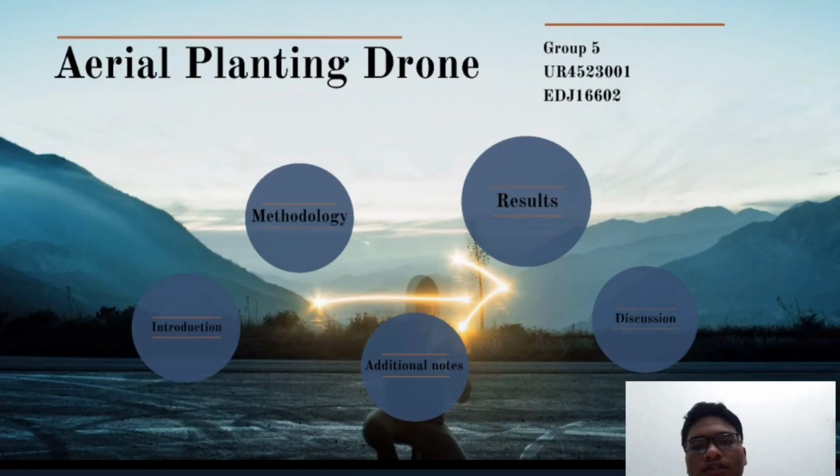Drone development already began in the early 20th century, during World War One. The main function of drones at that time was only for military uses such as bombing, surveillance, and reconnaissance. Drones didn't possess sophisticated ability at first, but recently drones have continued to advance, with many other uses such as photography, delivery services, military operation, search and rescue missions, and other activities.

I will also talk about the background of how our team got the idea to use drones as a method to plant trees. Recently, many news reports have stated that very serious climate change has alarmed numerous parties such as nations and governments.

To combat this problem, many nations and non-governmental organizations have started taking action to plant trees, particularly forest trees. But the problem is planting trees requires an excessive amount of human labor and wasn't effective. The main reason it's not effective is because of the terrain topography, and also the area which is very wide, taking a long time just to plant the trees.

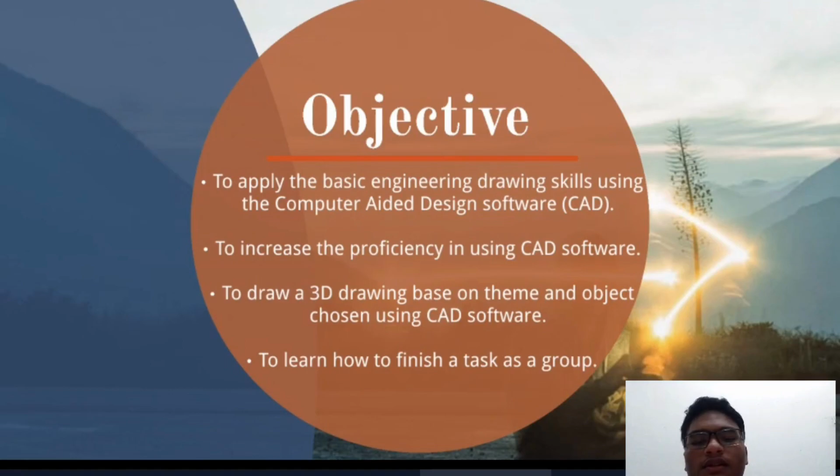For methodology, we basically finished the project within 1 month. We started on 29 March, discussing the details about the project, and then on 5 April our group leader Karani presented our theme to the lecturer, and then we discussed with the group members more about the project.

On 6 April we discussed further, and then we submitted the mini project report on 12th April, and uploaded the report on GC on 17 April. The last step was uploading the group presentation with video on 26 April.

For additional notes, we basically used fillet edge to create fillets in the 3D drawing, which saved us a lot of time upon completing the drawing.

For the result, we did 5 drawings: the main body, propeller, seed dispenser, stand, and assembly drawing.

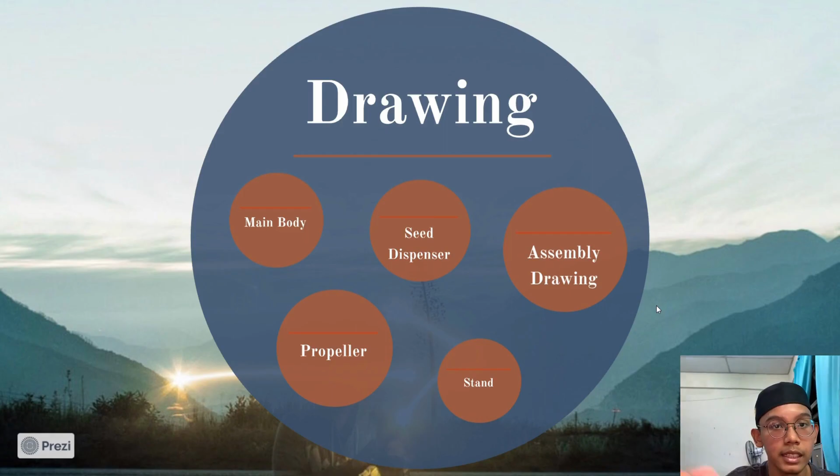For the main body, it offers a solid foundation for the rest of the parts, to guard against damage brought on by impacts or the environment. The last point is the drone's aerodynamics, which impact its speed, stability, and maneuverability.

I think the main body is the most important thing, affecting the impact resistance, speed, stability, and maneuverability.

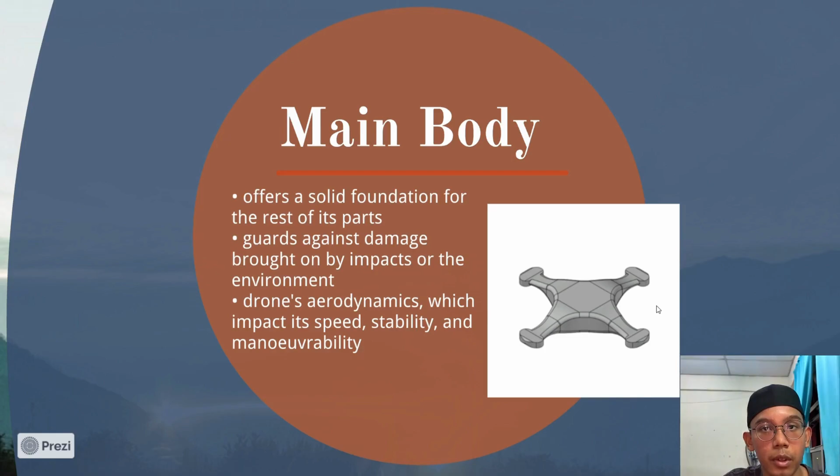Then for the propeller, its rotation produces a downward force that creates lift. The drone has 4 propellers.

The propeller provides propulsion which moves the drone forward or backward. It alters its speed and direction of motion by changing the speed of the propeller.

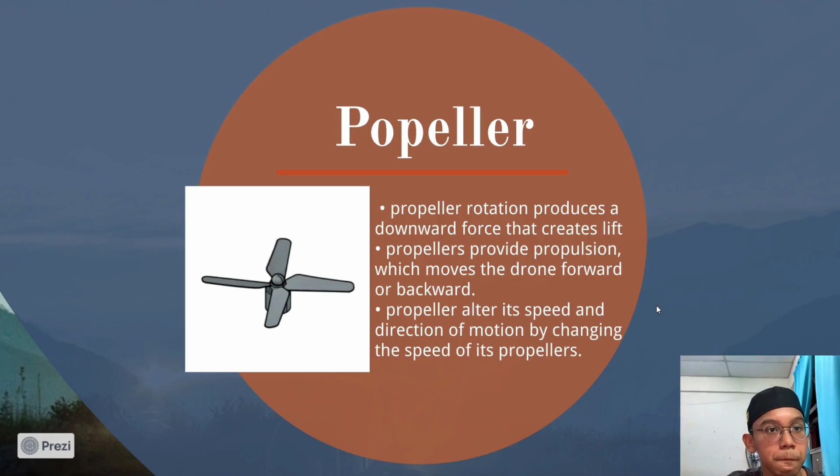The seed dispenser is to keep the seeds organized, protected, and readily accessible. It uses an electronic device to shoot seed pods at a strong enough velocity that they embed into the soil, so the seed dispenser is for shooting the seed pods onto the land.

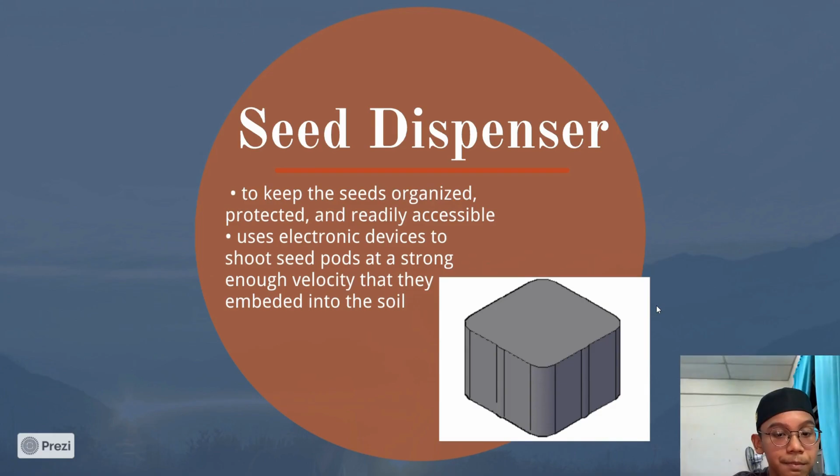The stand guarantees a calm takeoff for the drone and prevents any harm from an abrupt departure. It also guarantees a soft landing for the drone and prevents any damage from a hard landing, preventing the drone from breaking.

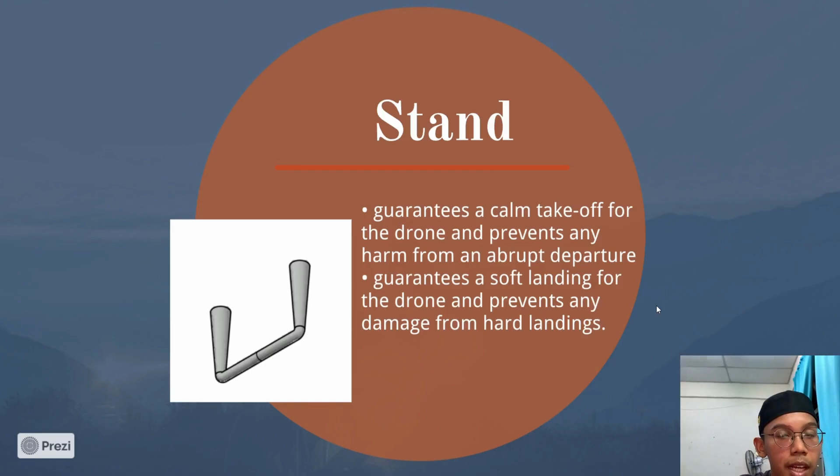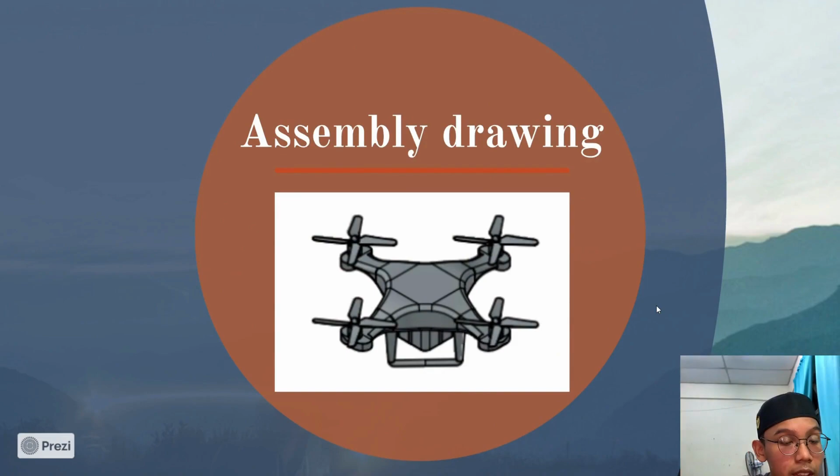The reason why the drone is chosen as an alternative to replace humans is because the drone can move easily in the air, and it can make the job easier and take a shorter time to finish the job.

The aerial planting drone theoretically can plant much more than can be done by human, because this drone can freely move, and it is very easy to use.

The reference drawing gives us a rough idea on how the object, the drone, would look. Then it makes it easier for us to make the 3D drawing using the computer aided design CAD software.

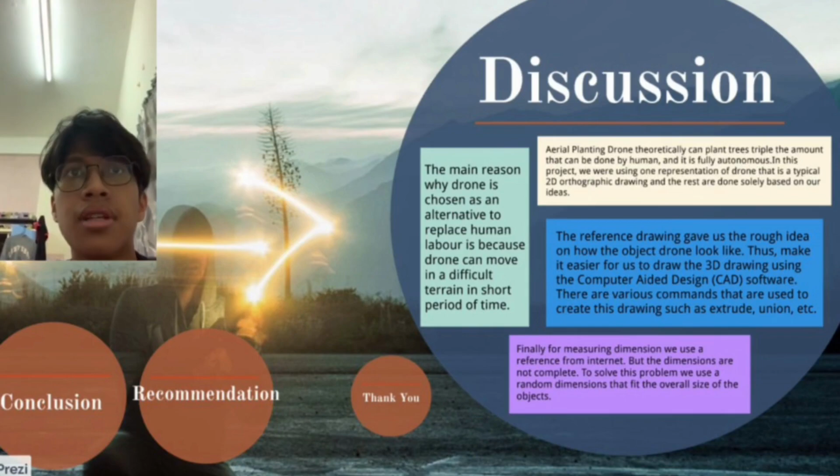Finally, the dimension we use is from a reference on the internet. To solve this problem, we use a random dimension that fits the overall size of the object.